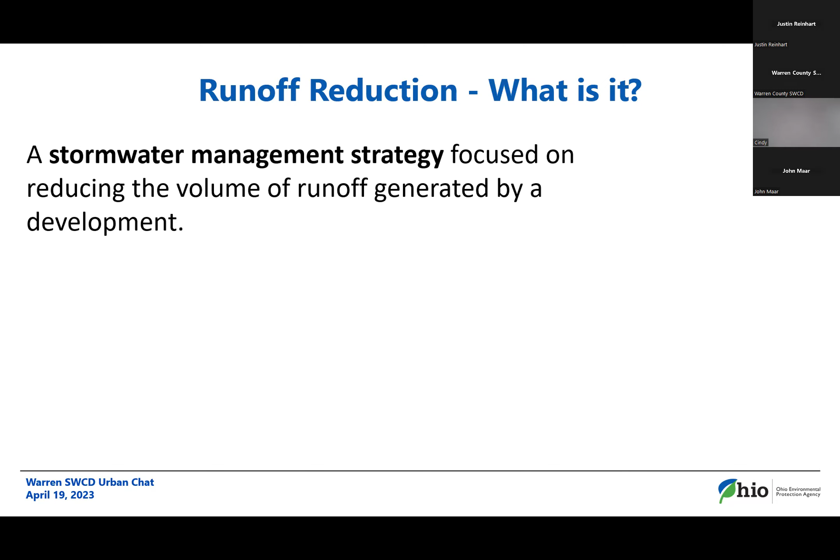And the keys to doing that are real simple. First and foremost is the goal of minimizing the disturbance or the disturbed area and the impervious cover of the development. There's not much more to say than that. There are a number of tools that could be used to minimize widths, shared parking spaces, minimize parking allowances based on zoning. Some of these things obviously are out of the developer or engineer's control because there are perhaps local ordinances, design ordinances, stormwater ordinances, or other laws and requirements, in which case the focus or attention turns to those municipalities and local jurisdictions in revising them, or at least reconsidering them.

The other is efficient layouts, utilizing pervious and impervious space as well. And that ties to the second objective, which is to maximize the use of pervious space and its benefits, through the ability to infiltrate, evapotranspire, and store stormwater, be it direct rainfall or runoff from those impervious surfaces that adjoin our pervious space. I will probably get those two terms confused as we interchange them here in the next half hour or so.

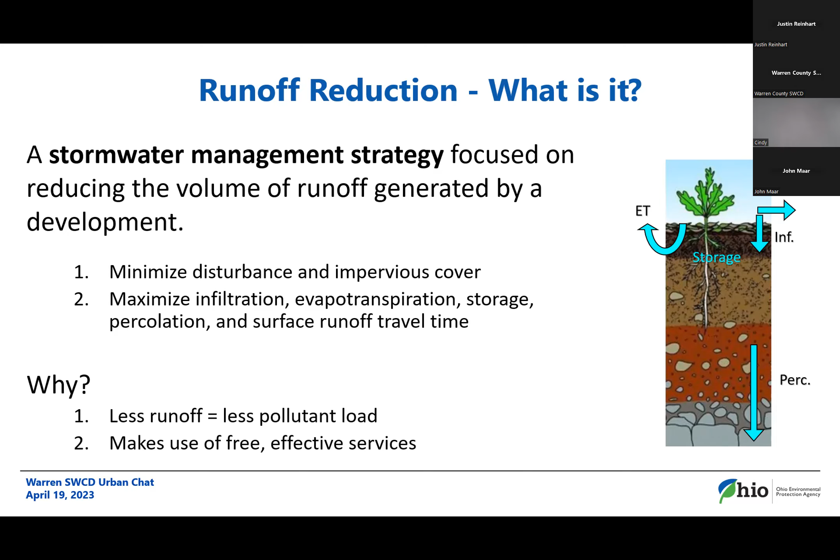So as we dig a little bit further, after minimizing the amount of impervious spaces and areas, the next fundamental component is disconnecting those that we do have to utilize, or maximizing those pervious open space areas. Those could be large areas, small areas, simply to make them functional or working for us rather than typical landscaping, which serves a beautification purpose, but not much else.

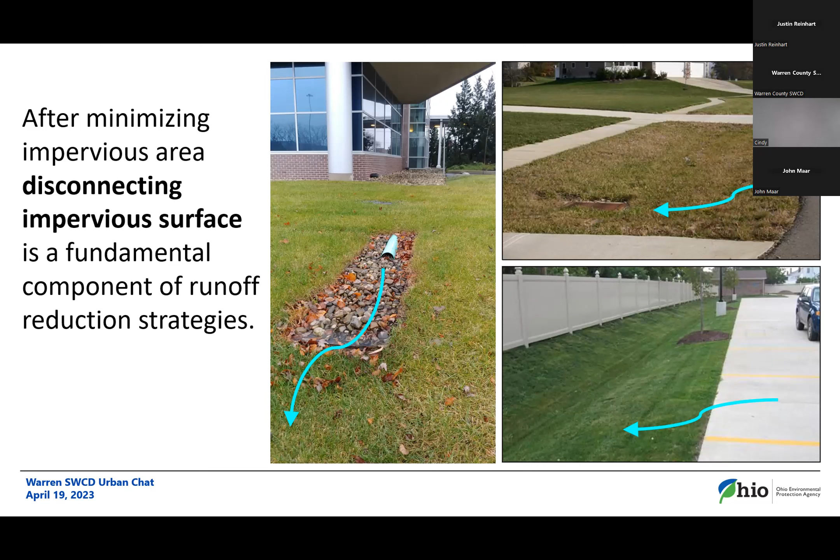Step two to that is, or the other component, is that we use BMPs that mimic natural hydrologic and ecological services. A lot of folks will want to immediately key in on the natural part of that. And I think these photos are good because they sort of demonstrate a side-by-side comparison of what those natural services are. On the top, a drainage, probably an ephemeral type stream coming through some woods, compared to an open swale that's designed for drainage.

And on the bottom, a low-lying area that may or may not qualify as a wetland, but certainly those pocket storage areas that provide surface storage, but also within it the soil and vegetative components that provide treatment mechanisms and allow that water to sit and infiltrate or evapotranspire. So it's not the look we're going for, although these can look similar, and that's sort of how it was first built, but it's replicating the services there through the soil and vegetation.

They are engineered. They're not necessarily trying to, although it's great to do, preserve the natural system, but an engineered system that mimics those natural tendencies and landscapes.

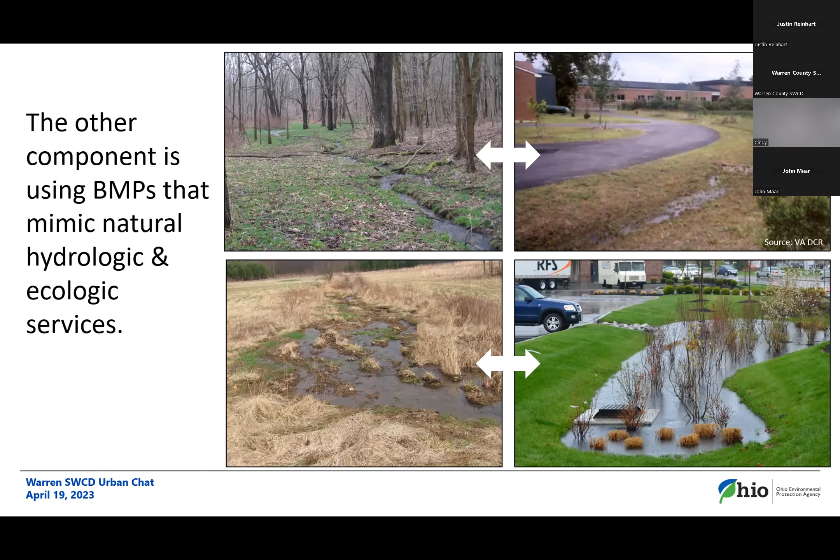So what I want to do first is go over 4 key understandings, or key points, and highlight them, as they're important in order to make this strategy really work. I should probably point out that the overarching overall strategy is

limited in its use to either sites that have the space to utilize these BMPs, or where the engineer can configure planned pervious space for beneficial use, or secondly, projects that are from the onset seeking to gain these credits. For example, LEED certification type buildings, mostly probably in the institutional development class or category,

where imperviousness is a little bit lower, and there are additional benefits to some of these types of practices from an educational standpoint, or other certification or credits through maybe stormwater fees or reduced other forms of assessments and taxes.

Okay, so these 4 key understandings. The first one is that the runoff reduction BMPs or practices are, as alluded to earlier, planned and designed practices. So in order to take credit, they need to be properly sized for the water that they're going to be receiving, the runoff.

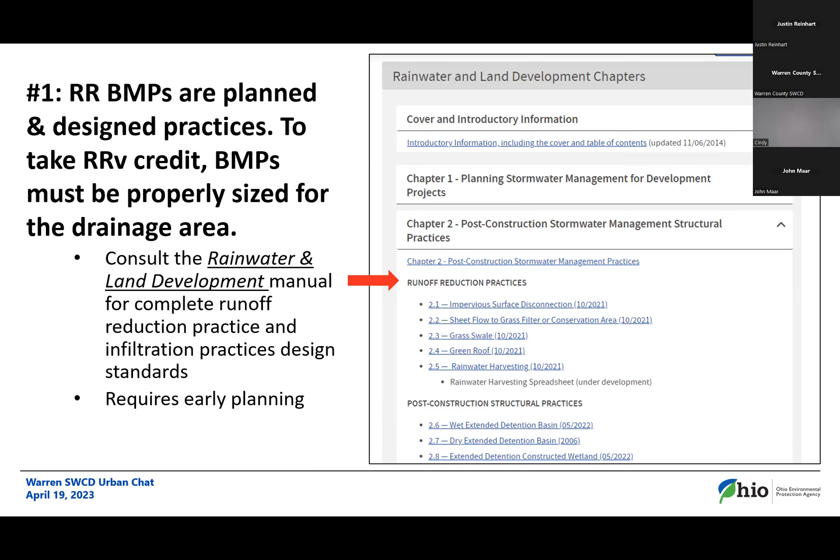Making sure, probably first and foremost, that we maintain sheet flow. If we have a gully form with water flowing in a concentrated manner, it's going to bypass all the things we're intending to do here. So the key to most all of these practices is spreading the flow.

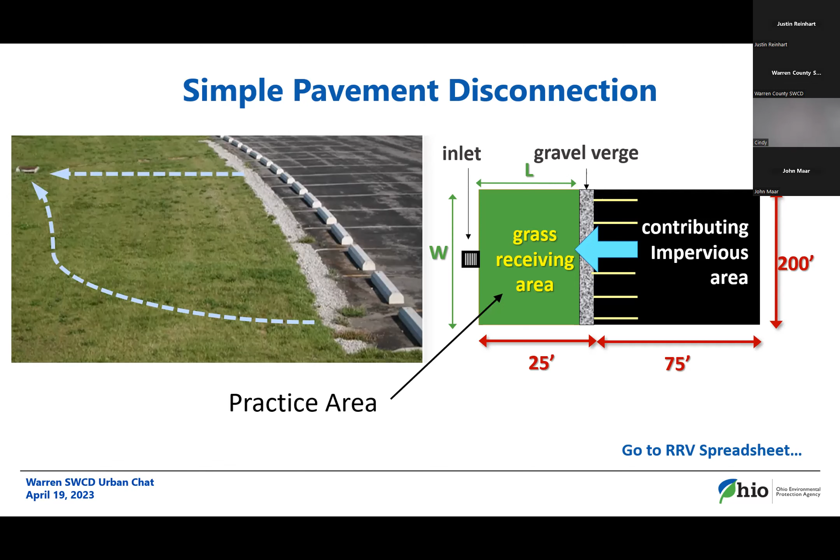And when I mention flow, runoff, etc., remember I'm looking at it from a water quality volume standpoint. So that leads me to the second highlight here: touching back to what I said earlier, the water quality volume is a little bit different from our traditional H&H, or hydrology and hydraulic engineering, in that it's representative of the annual volume of runoff we receive every year, which around the state is plus or minus 35 to 40 inches a year.

We're trying to capture a certain percentage of that and treat it, or in this case, make it disappear. The concept is that the vast majority of that 35 to 40 inches comes to us in small rains, small summer showers, short thunderstorms on the order of a half inch to an inch. Hence we have a 0.9 inch water quality volume requirement, as opposed to the big news items - the 2, 3, 4, or in the case of Fort Lauderdale, Florida, in the last week or two, 14 inches of rain - that caused the problems and receives all the news.

Ultimately, the practices work best as, in a sense, a treatment train, where they can slowly abstract a portion of that volume, decreasing the ultimate size of the final primary BMP.

So in many cases, that catch basin will still be outletting to a stormwater pond that will provide other services, but that pond will now be smaller. And they can also be, as I said, in a treatment train sense, stacked or ordered so that one practice flows into another.

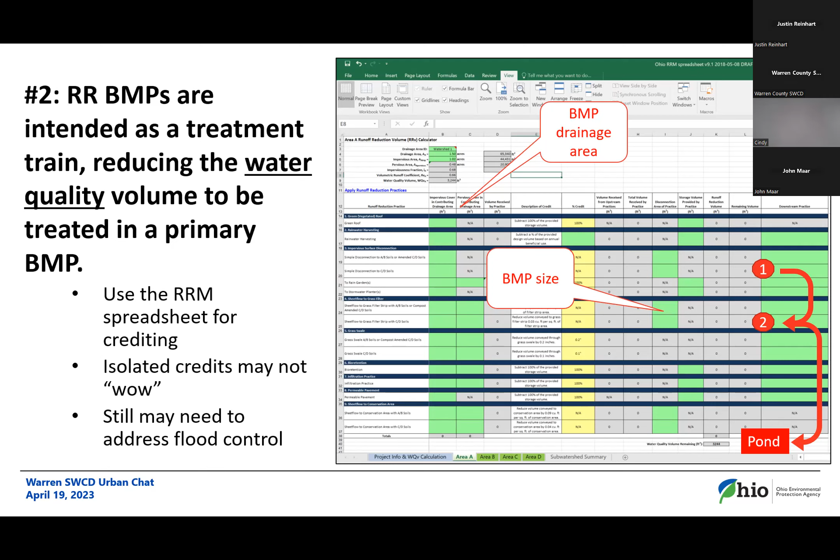I guess this is more 2A than 3 the way I presented it, but just to elaborate a little bit more on everything I just mentioned, I want to emphasize the point that the runoff reduction credits are small, but in terms of what we're trying to achieve, they can be very powerful.

So just capturing 0.2 inches, or as you look back to that spreadsheet, roughly what the runoff reduction credits are getting, it captures a tremendous amount of the total runoff from a site and puts it through either loss, abstraction, or treatment if it's just being filtered perhaps through that grass area.

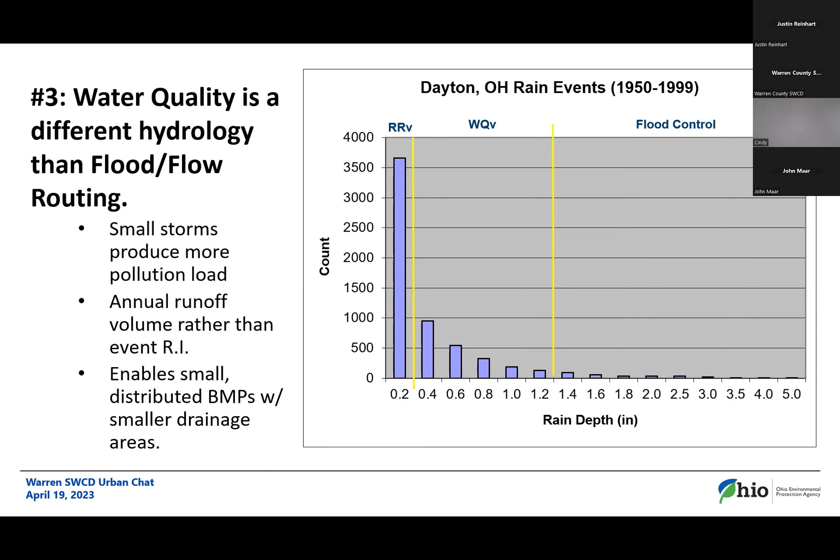Okay, and I guess highlight key point number 4. Soil plays a major role in runoff reduction. And it's not just the name of the map unit or the hydrologic soil grouping that we will first gravitate towards as engineers as we use in calculations, but what those represent, which are the more detailed, finer points and properties of the specific soil on site. I think back to my schooling in civil engineering, and I was really hyper focused on the water element.

I got into this position and career because I found the movement of water fascinating. Thought maybe I'd build dams someday, didn't quite make it to that level. Looking back, I've talked to a lot of students and up-and-coming engineers, and I've always said the one thing I wish I would have learned more about, and that engineering curriculums would focus on more, is soils. That was something I had the benefit of learning about in my previous position with the Division of Soil and Water at ODNR and Department of Agriculture.

The point is we look at texture. A lot of times we gravitate towards sands - yep, they'll infiltrate, clays won't - and leave it at that. That is important, but most soils are a mix, and they're also layered like a cake. So we have a profile in which these properties vary, potentially drastically. It's also a misunderstanding to say clays won't infiltrate - they can and do, sometimes very well. It depends on the conditions.

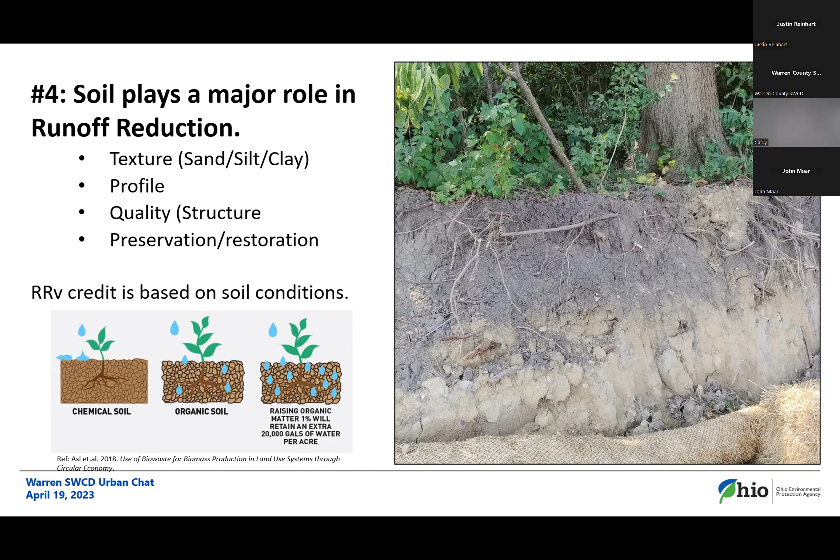So those are my 4 key points, and as I mentioned with the last one, everything ties together. As engineers, we want to tie to the hydrologic soil groups developed by the USDA, which comprise a lot of these elements and are good for our assessments from runoff calculations. Because of that tie, the credit values are split - a higher credit is placed on practices built on A or B soils, which are more infiltrative, and a lower credit value on C or D soils, which tend to be more restrictive towards infiltration, producing more runoff.

I did a quick assessment of Warren County, and this may or may not be terribly accurate. I took the largest area I could through the web soil survey and just did a quick summation of the soil groups, hoping that's fairly representative, although there are a number of different larger soil regions within the county in Southwest Ohio.

But I think this is probably pretty representative of much of the state, actually, in looking at the numbers, in that we have a very small percentage of A and B soils, generally alluvial deposits, sands and gravels, alongside our rivers and streams, or through prehistoric stream beds, or prehistoric beach ridges to the north part, or our glacial deposit end moraines, kames and eskers that are also isolated around the glaciated parts of the state.

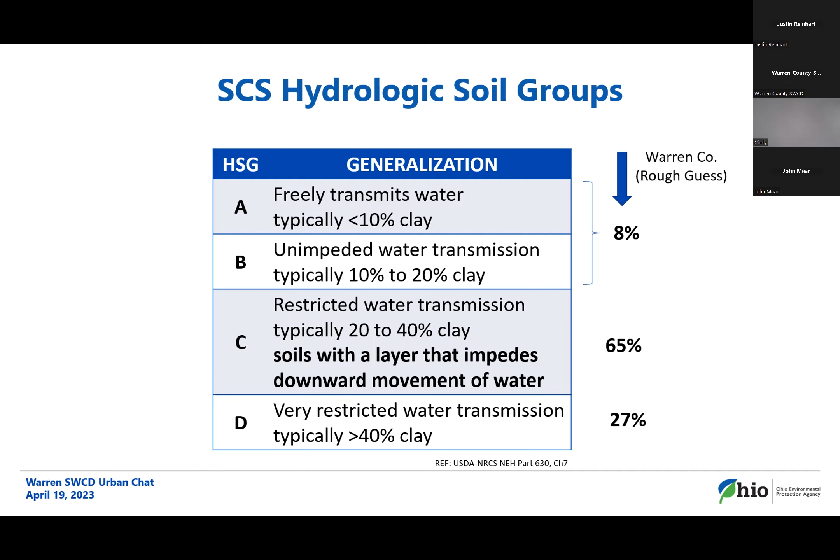So just to dive into the weeds a little bit more, when I look at these C soils, it really begs the question of, well, what do I have there and what can I do? How could this be a benefit?

So one that is somewhat prevalent in at least parts of Warren County, the Xenia silt loam, is a C soil, and we see some silts and clays. Runoff class is low and we are moderately well drained. So we see sort of a mixed bag on, well, what do we have here in terms of infiltration versus runoff?

And a lot of it probably keys on what I've highlighted here into the properties and qualities: depth to a restrictive layer, 40 to 60 inches to a densic material, so a dense layer. And we see that again in the chart here that shows a little bit of the clay content in the profile.

Most soils start out very low in the topsoil, very hummocky and loamy. Then we hit our subsoils, our clay content goes up, but then it gradually goes down as we proceed through the profile below, in some cases to 20%, which is a reasonably infiltrating soil.

What does that do for us? Well, we've got this densic layer down there. That's going to give us a perched seasonal high water table. So now we're going to have that water occupying the space above it in which we could be infiltrating stormwater.

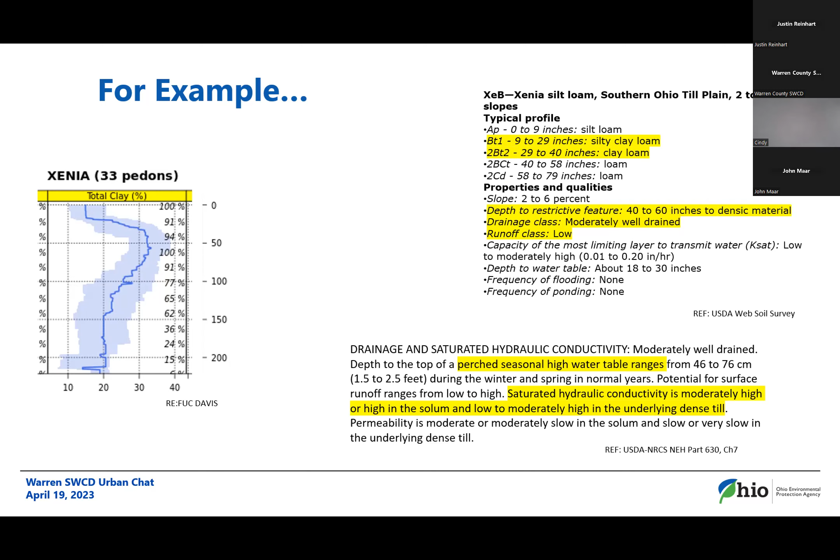Okay, so that's sort of just an overview of some thoughts before we dig too deep into the practices and the application of them.

I'll call your attention to the current permit language, and as of now, this shouldn't change in the next few days, but this will be the same in the sixth generation of the permit, which starts this weekend. It says the director may consider these practices to demonstrate compliance with post-construction requirements 3G2E for areas of the site not draining to a common drainage system, where the permittee can demonstrate the intent of pollutant removal and stream protection is accomplished there, which requires review and approval by Ohio EPA.

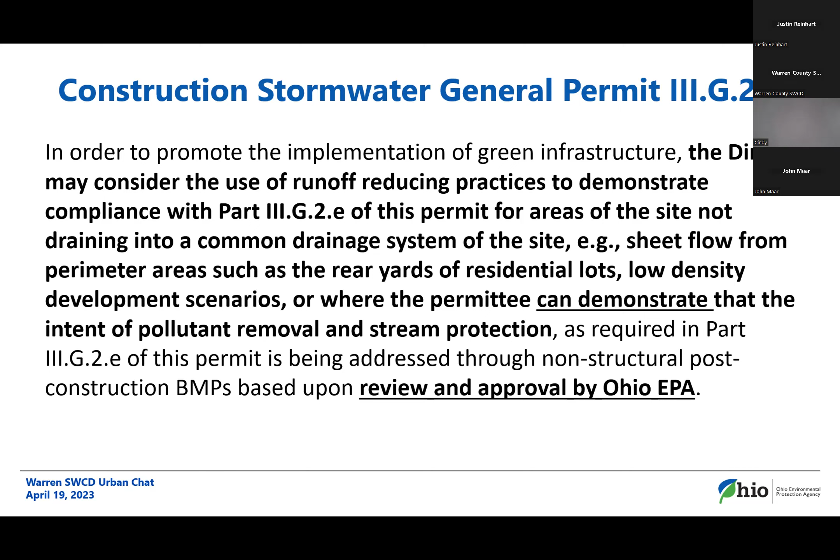So that language has actually been in the last couple of generations of the permit. We just called it green infrastructure before runoff reduction practices. The point is that through this process we've established, the standards in the rainwater manual and the crediting system through the spreadsheet, that's our review, meaning Ohio EPA's review and approval. We've approved this process to utilize for these areas, and perhaps where most interest lies is in things like rear yards or low density non-traditional developments, park space areas, for example.

So when we talk about perimeter areas, how can it be utilized? This is from a recent site. You can tell this is a low impervious development, somewhat of an institutional building coming in, where there's a paved roadway extending around the building that defines the boundary of the project and does not flow into the drainage areas highlighted here in yellow, described as undetained, or 1.01 acres overall.

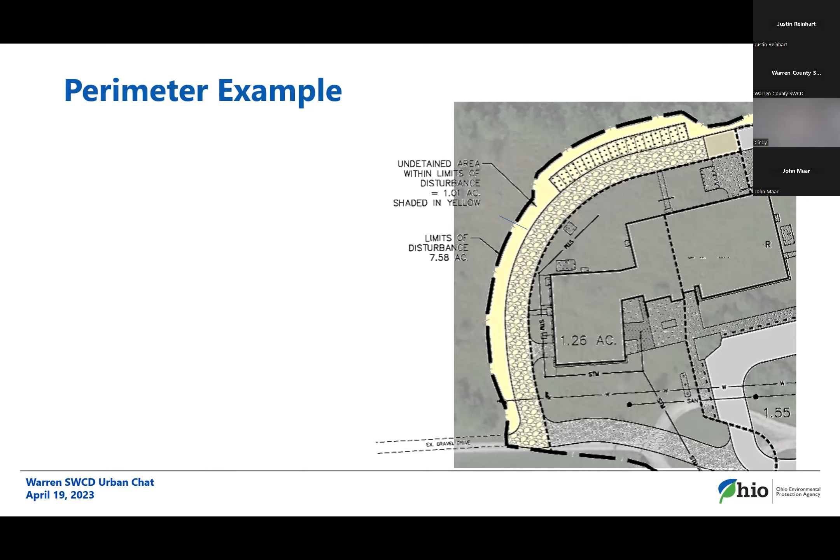I'm only showing you half of that 7-acre site. You can also see we have plenty of space and property extending beyond the actual project site. What we can do here is simply use that area. Hopefully from that photo you can tell that's heavily vegetated and forested. We can use that as a conservation area. We have our area sheet flowing off of the pavement into that.

We can dedicate, using the spreadsheet, for the 26-foot wide pavement, an area swath of about 45 feet on these C&D soils, and define that as a conservation area. And that runoff is then treated, so the water quality volume obligation for that 1.01 acres is attained through the conservation area.

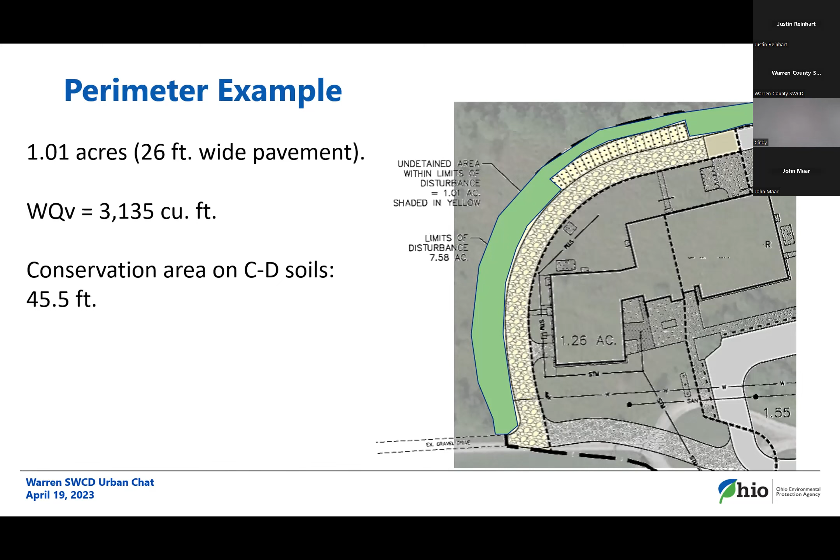Just pause for a second, because I think what I'm going to do is continue on and then maybe pull up the spreadsheet to show you later, so I don't have to do the technical dance back and forth between Excel and the PowerPoint.

The other example is in a residential scenario setting. So two different directions this goes: one being large lot developments, which we see from time to time, something on the order of 2-acre lots or more, in which case there's plenty of space that could be utilized for these practices. The other are maybe more medium density developments, which tend to be a little more cookie cutter in design, in that the lots are fairly identical.

Maybe here and there shapes will change as we reach cul-de-sacs and corners and whatnot, but by and large they generally tend to be approximately the same size, and the homes and building pads generally tend to be about the same size and location within the lots as well. So something like this, one of obviously 40 homes going into a subdivision.

We've got a boundary lot here, and it is almost a half acre in size. We've got a building lot for typical home dimensions shown. I assume these are falling within the typical world - if not, then let me know. But I've used this example a couple times before.

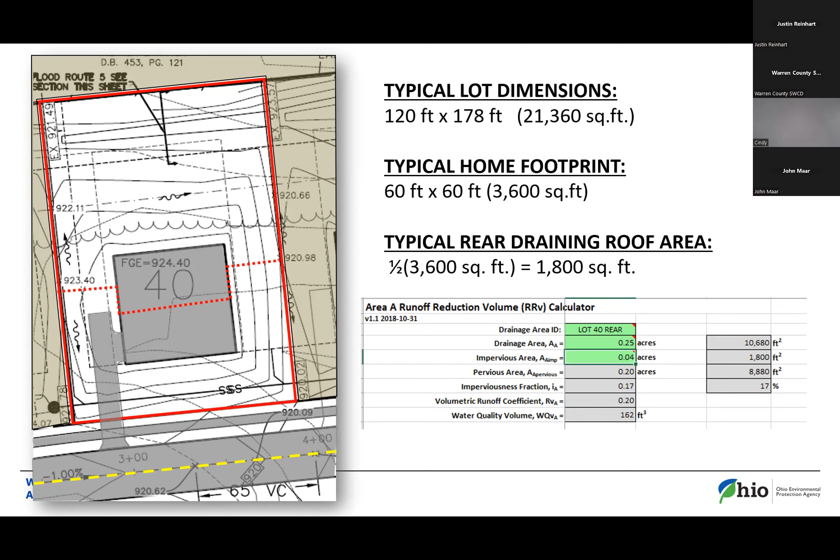And what could I use in terms of runoff reduction practices here? Well, the first is if I can disconnect those downspouts, have them flowing out into the grass. Now, reasons why this is good and bad from a development standpoint: obviously, homeowners generally aren't fond of standing water, or want water to move away from the foundation of a house structurally.

So there's certain criteria here that we need to make sure that we can do both of those. But I can designate a grass receiving area for, in this case, 2 downspouts of a certain size, and apply the credit through the spreadsheet here.

So if I were to look at the water quality volume we're dealing with, and these numbers get small. Again, this is typical, lot 40, a water quality volume of 162 cubic feet, again small. I'm now subtracting out through this disconnection 40 cubic feet. I still have 122 cubic feet that might flow into a rear yard catch basin and then into my pond.

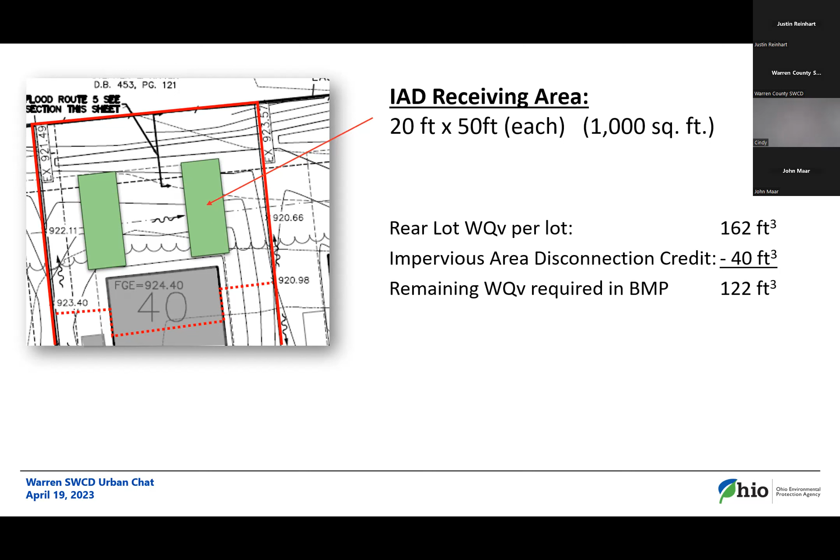Now I've reduced the size of the pond. That may or may not help or be of benefit to you. Perhaps more beneficial might be to dedicate a portion of that lot as a conservation area to absorb the remainder of the water quality volume.

In this case, 30 feet of that lot would be left in a conservation area. Using the credits in that square footage, I'm now deducting another 122 cubic feet, effectively zeroing out the water quality volume owed for that lot. So that's the quick and simple math to it.

I don't want it to seem too hard, but I also don't want it to seem too simple in terms of these practices, as I said, are design planned practices.

Now the question there becomes, I guess, how do we evidence all of this, and what do we do in terms of submittals? Well, as I alluded to, we have the spreadsheet that is created, which would do the math for you from a crediting standpoint.

The BMPs need to be identified on the plans and then the SWPPP, including where they're at, their dimensions, any soil restoration activities that might occur, preservation activities. Typical drawings are probably feasible in the example I just gave. Others may need to be individually detailed if these are very large.

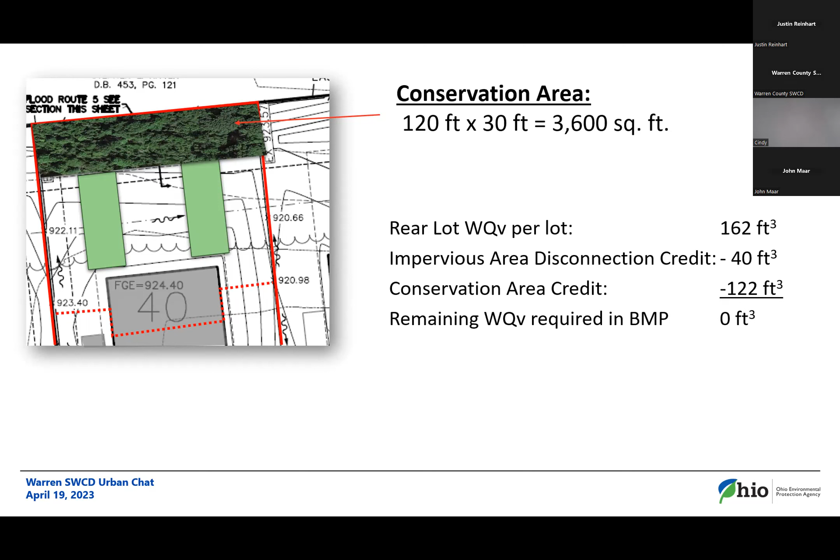Pros and cons to that. It may be very desirable, an actual amenity in some communities' properties, and others obviously are going to want a 4-inch turf fescue grass. And those are decisions that will need to be made by the designer and developer as to the practicalities.

So what we're looking for there is the fact that, once landowners or homeowners move in, these practices aren't going to be viewed as having a stormwater purpose like the pond up front will be.

So we need to take some measures to safeguard it. Some options are spelled out in the Rainwater and Land Development Manual, as far as tools that could be used, from legal protections and instruments such as easements and deed restrictions to educational tools, and other potential ideas like securing definitions in plat maps and deeds, etc.

That's again, I think, where we're at. It's maybe not the clearest answer, but hopefully gives more detailed guidance, or some detailed guidance.

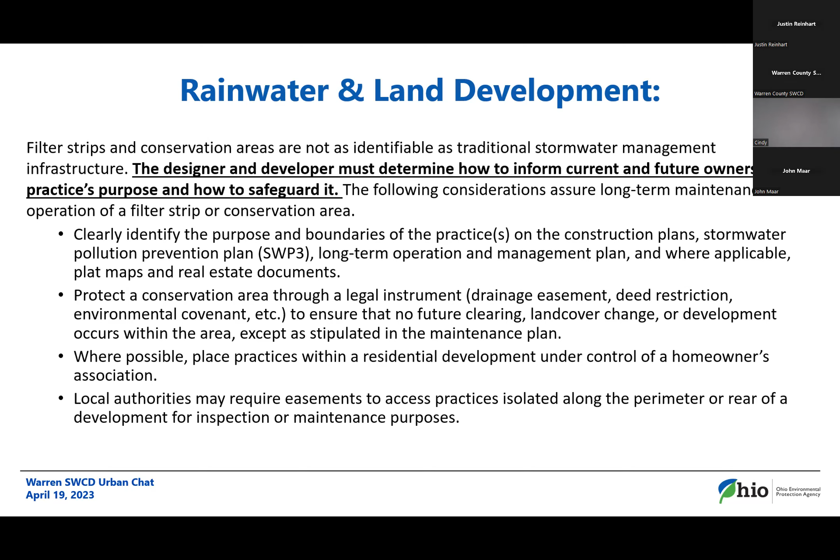While I'm on the topic, before we wrap up, I want to mention that the rainwater manual is online, and I should have put a link here. Our website's changed a couple times now since I've been at EPA, they like to do that to me, so I don't have a link. You can probably Google it, but it is maintained there online.

The agency, through mostly me, is in the process of improving, expanding, and updating that. And as things change, or any announcements come, including training opportunities such as this webinar, or fact sheets, or anything else on the technical end, not the permitting end, you can subscribe to my email list.

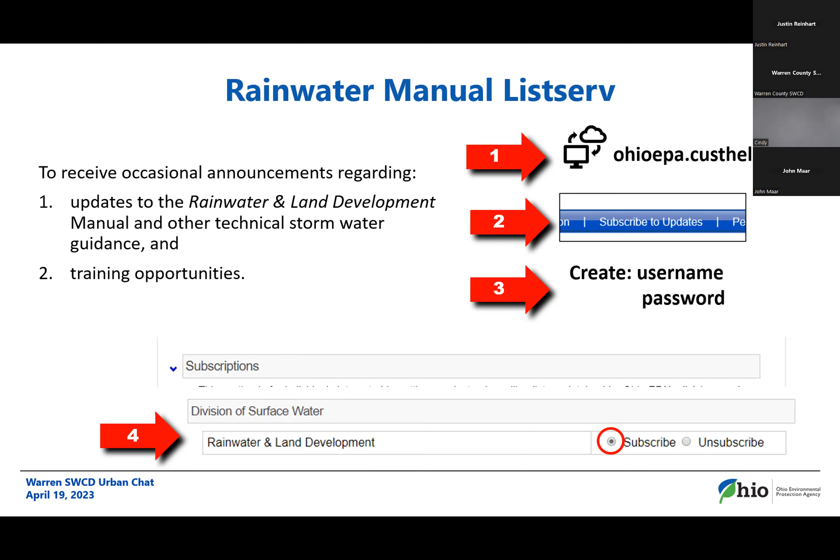What I'll do here, if we have time, is first, my contact information is on screen. I'm going to try and pull up the spreadsheet and see if we can answer any questions quickly, because I want to still leave 10 minutes or so for Justin to talk.

I'm believing you can see my screen here, and it's now changed over to the spreadsheet. Appreciate the confirmation. So I have in here populated that example really quickly, let me start from the beginning.

The first page allows you to put in your project information, and I have 4 different tabs. So say you had a site using 4 different sub areas, maybe you're going to take half the parking lot to a filter strip on the perimeter, and the internal part of the parking lot to a bioretention cell, and the islands, you could designate those as different areas, up to 4 different areas. You could use more spreadsheets if it gets more complicated, but that's as many as we built in for now. It will total everything on this first page from the 4 different areas.

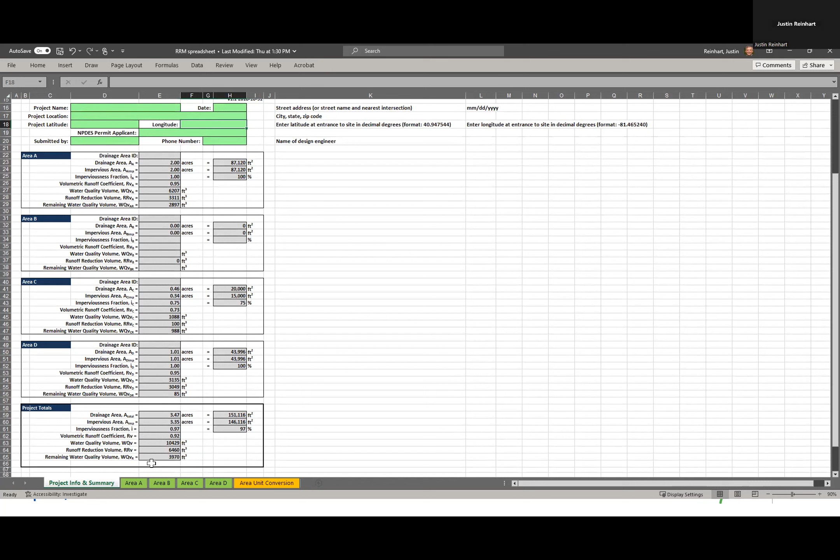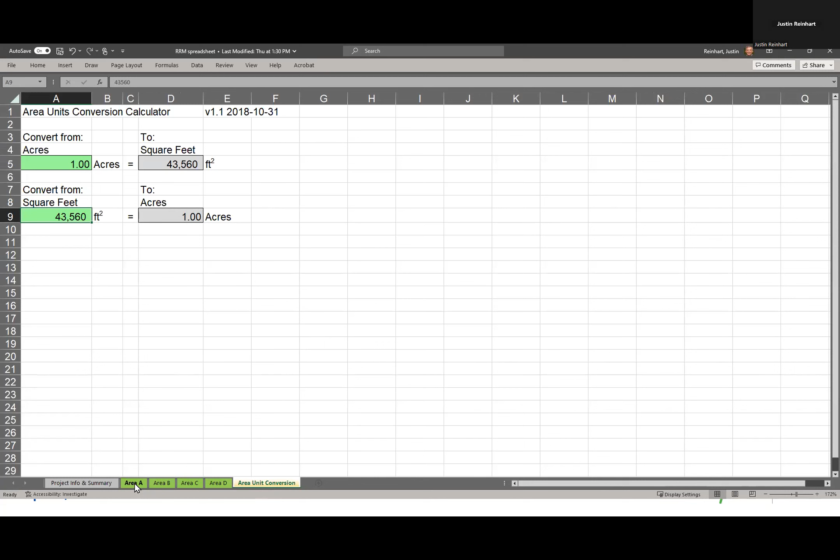And lastly, because we go back and forth in the spreadsheet, unfortunately these are small areas so square feet tend to work well, but most of our calculations present themselves in acres, so we throw that calculator in at the end just to make life easy for you. Or I just type the formula straight into the cells.

I don't think I did it here, but what you'll do for one of these areas, and I've used this tab for a few different things, let me move to area D, which is where the calculation I want is. You can see up top, you plug in the drainage area for this particular sub area and the amount of impervious. In this example, it was just a tick over 1 acre from that perimeter driveway draining into a conservation area. So what I'll do here is just go down, find the last BMP, or sheet flow to a conservation area.

I said I was in C—this is not the C/D hydrologic soil group category, but C or D soils. I had that put in now in terms of square feet, my 1.01 acres of roadway, and I had no grass going into it or pervious area.

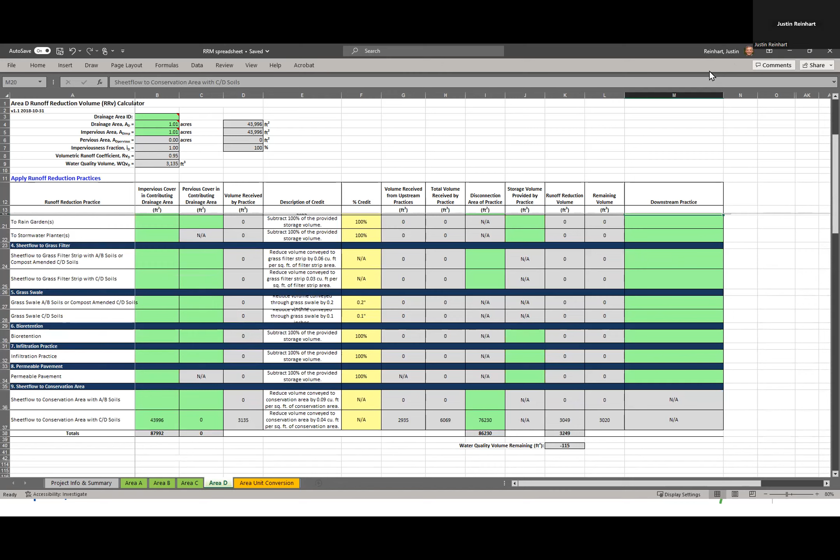Okay, so if we have time for questions, I want to leave some time to talk about the local requirements there, but anything I can answer now?

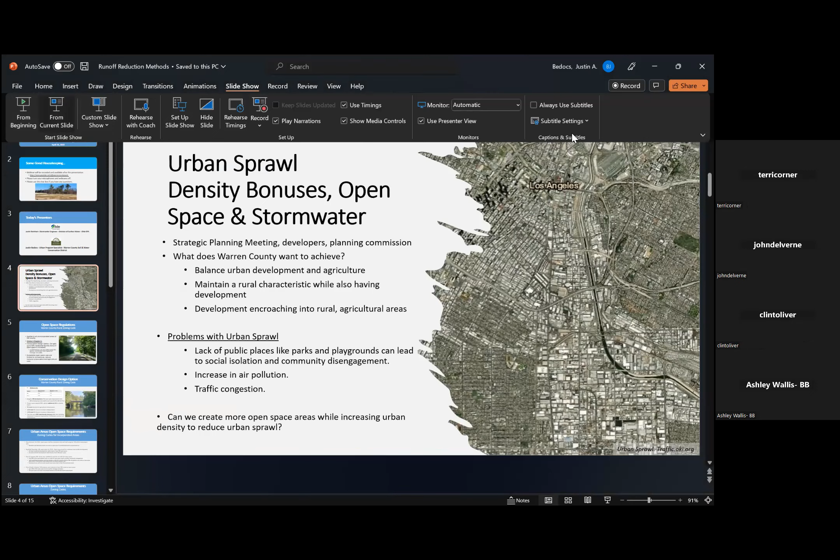All right, going to zoom out here a little bit and talk about urban sprawl and open spaces, density bonuses, and how we can use some of these runoff reduction methods or other infiltration practices to also count for stormwater control. Earlier this year, we had our strategic planning meeting.

The table I was sitting at had developers, contractors, and a gentleman from the Planning Commission. One of the questions asked was, what do you think the goals are for Warren County Soil and Water in terms of natural resources management in Warren County? One of the responses I liked was from the Regional Planning Commission.

He mentioned that we want to promote development—we need development—but we also want to preserve this rural aesthetic that we have in the county and try to have less urban sprawl and more open spaces. Basically, we want to balance urban development with agriculture.

We have farmland preservation programs here. We're seeing lots of development and urbanization in the county, encroaching into rural agricultural areas. There's a nice picture here on the right of Los Angeles, some pretty good urban sprawl, not seeing a whole lot of open space or green space.

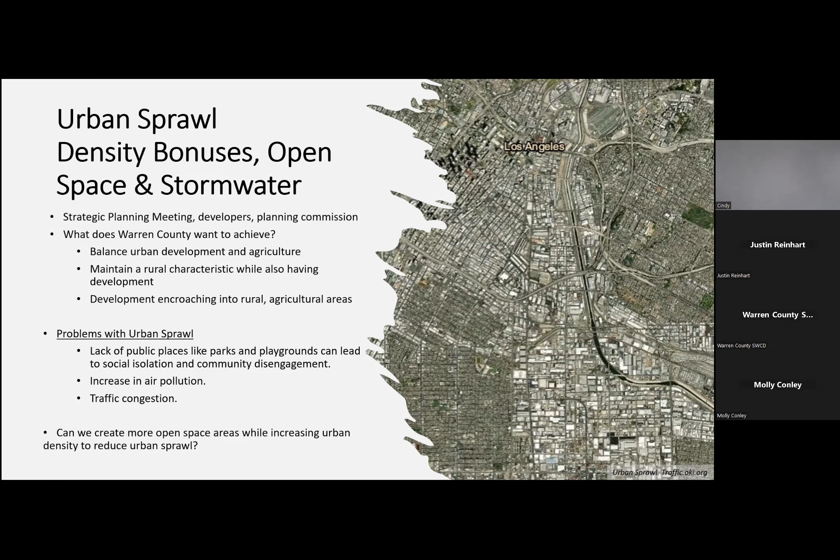So are there ways that we can create more open space while also increasing urban density in order to reduce urban sprawl? So let's talk about urban density bonuses in these areas.

When I looked at the Warren County Rural Zoning Code, which applies to all unincorporated areas of the county—this is from Article 2, Chapter 3—they have this conservation design option where you can gain up to 50% residential density bonus if open space is increased. The lot dimensions can also vary when using this option, so you can deviate from the typical lot frontage and width. There are different types of open space uses accepted: recreational category, natural resource preservation, and also agricultural uses.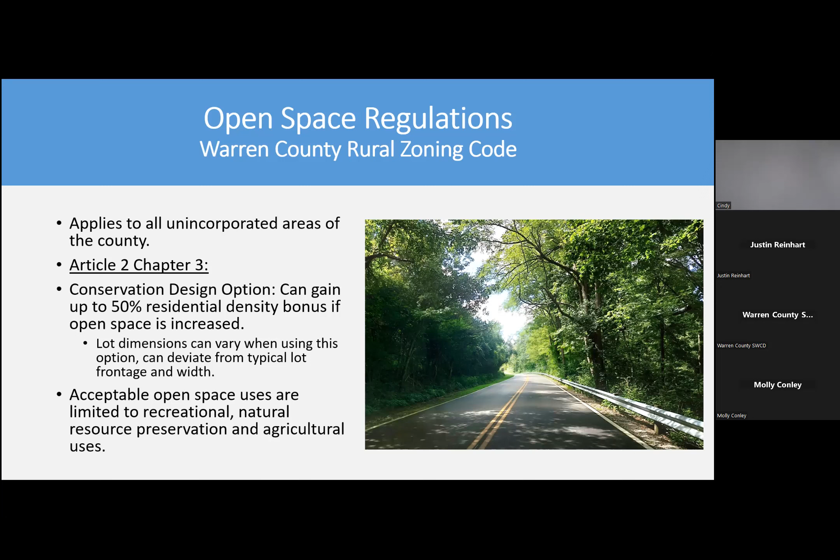So you have this table here that shows minimum lot sizes and the district density units per acre. So the RU, residential unit, or I think that's rural residential, has a base density of 0.20 units per acre and a minimum lot size of 1.25 acres.

The R-1A has a little bit of a higher base density. You can actually gain a 30% density bonus to that base density if the open space requirement is met. So for the RU, 40% of the total project area shall be open space.

For the R1A, you need to have 30% open space. But if you bump that open space up to 50%, you can add an additional 10% to that density bonus. You can get an additional 5% more if it's for agricultural enhancement, another 2.5% for natural resources enhancement. And I checked, that does include stormwater control.

And then another 2.5% more if you have any kind of historic buildings on the property. So in the end, you can get up to a 50% total density bonus while also satisfying stormwater treatment requirements if those infiltration practices are implemented.

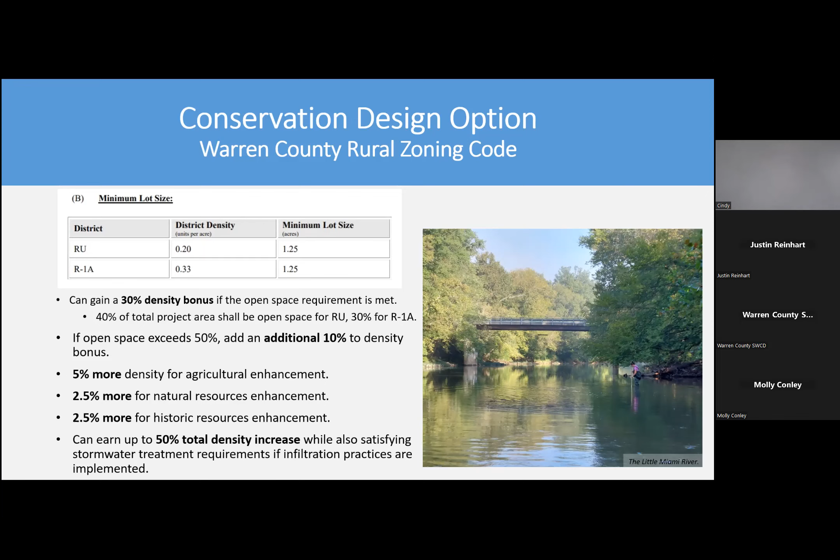So trying to tie this together with Justin's talk about the runoff reduction method, can we get two birds with one stone here?

No animals were harmed in this production, by the way.

So that was the rural zoning codes. And now I also looked at incorporated areas, and these vary a little bit from town to town. For City of Mason, for the PUDs, they have an open space requirement of 20% of the total project area. And both retention and detention ponds can count as open space if they're partially dedicated to recreational use.

So that's another thing I've seen - some of them will not allow the detention ponds, the dry basins, because they don't have as much recreational value. People like to have standing water and birds and ducks and things, and paths to walk by. So some of them will include the detention ponds in that bonus, but other ones won't.

Deerfield Township, 20% open space is their minimum. But the open space must also be common area to the development, not just one person's house. It needs to be accessible to the whole development.

You have all mixed residential developments should have at least 30%. And then park residential developments should include at least 40% open space.

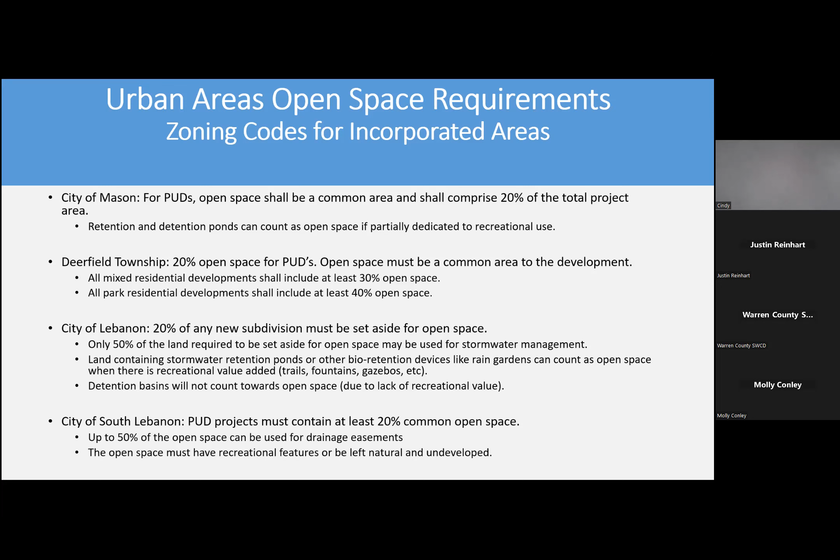South Lebanon, their PUD projects must contain at least 20% open space. And again, up to half of that could be used for drainage easements. Must have recreational features or be left natural and undeveloped.

City of Franklin, they were a little bit different, a little bit more vague I think on theirs, but a little bit more flexible too. So they say they must have open space, but they don't really outline a distinct percentage - the planned residential conservation overlay district.

So they do want to maximize conservation of open space. They have a 25 acre minimum, and 30% of that shall be open space in that conservation overlay district. One of their six objectives is to reduce stormwater runoff and improve water quality from runoff. So again, these infiltration practices, runoff reduction, I think that would apply to theirs as well, pretty good.

Down in Morrow, 25% of the total lot or parcel shall be dedicated as open space. No more than 25% can include water bodies or wetlands. So they're a little bit more stringent on theirs. The other ones were up to 50%, a little bit lower that they would accept.

They have density bonuses that you can get. Basically 1% density bonus per additional 1% of open space created past the minimum, up to a maximum of 15%.

Hamilton Township requires a minimum of 20% open space for the project area. 15% of that must be common areas, and no more than 35% of that could be used for retention or detention. So keep that in mind, they can't use all of it, but you can get bonuses for doing this stuff.

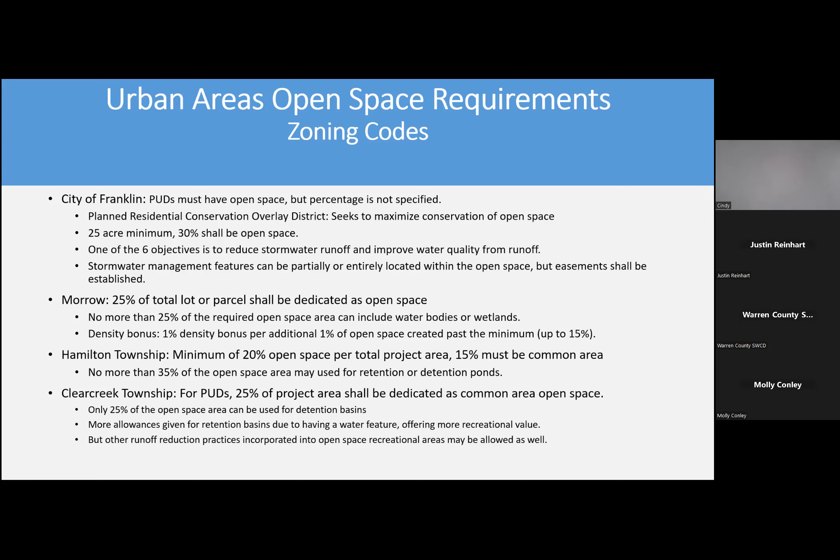And then Clearcreek Township, 25% shall be dedicated as a common area open space, and 25% of that open space could be used for detention basins. They have more allowances given for retention basins due to having the water feature and the increased recreational value, but other runoff reduction practices incorporated into the open space areas can be allowed as well.

So you have this extra open space you're creating, and what can we do with it? We were thinking stormwater control practices can count to an extent. As long as you have these recreational components built in, that'll increase the value and the density credits you can get. A good example here is South Lebanon, they applied and qualified for our Operation Rain Garden grant, and we awarded them $50,000 or $60,000.

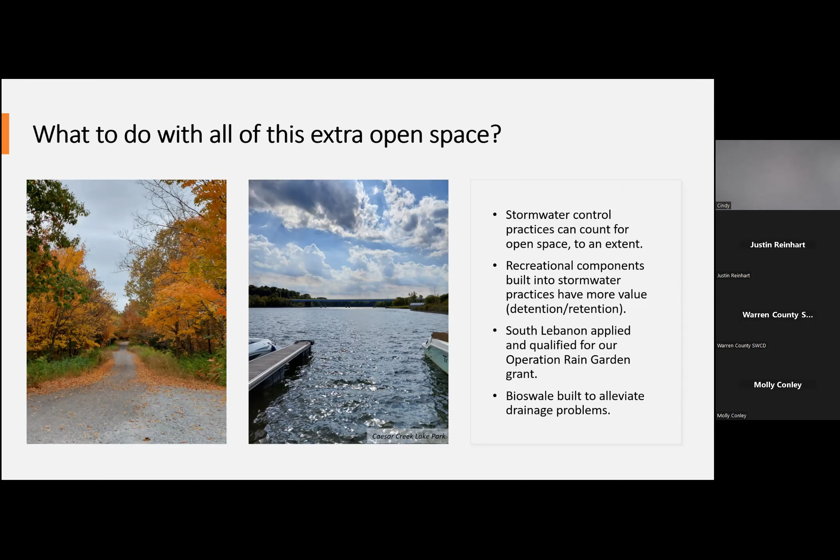They developed this bioswale to help alleviate drainage problems they had in the area. So this was the existing conditions. You can see the topography draining this way, kind of to the left and then to the bottom here. And you have an existing building, a house, and some trees over here, but they had some drainage problems in the area.

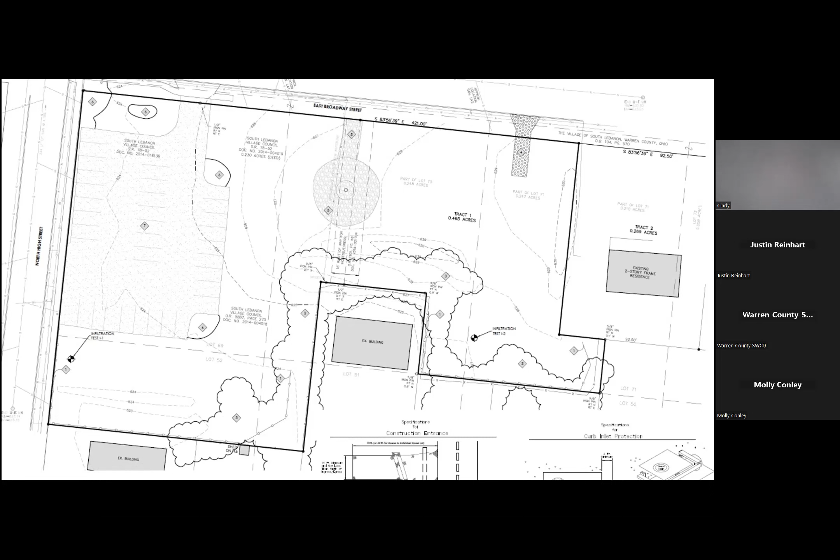You had a parking lot here, so impervious surface, lots of sheet flow coming down. This was already an existing project, and this bioswale was put in after the fact. But bioswales could probably be built into the SWPPP design, into the subdivision design from the get-go, and probably get those runoff reduction credits that Justin talked about earlier.

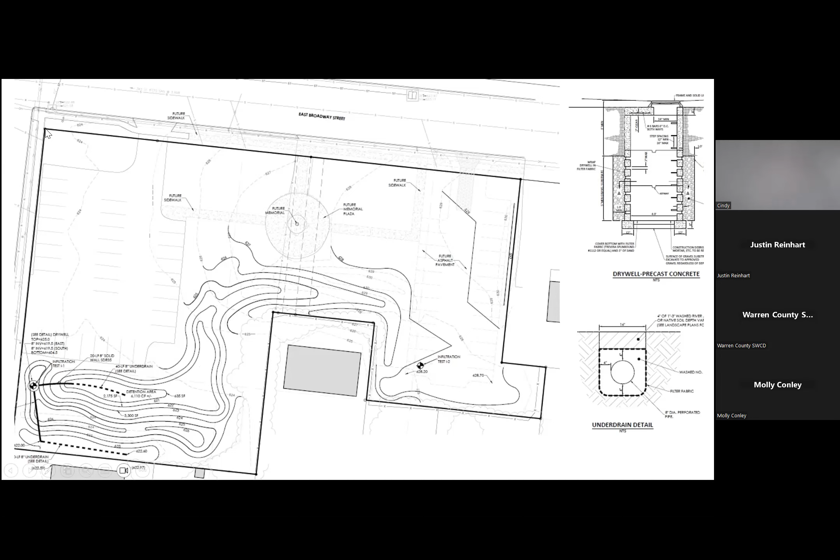So here is the design of the bioswale. It's kind of an L shape here, collecting that sheet flow, allowing it to infiltrate into the detention area. They put an under drain in with a dry well to let that stormwater soak in. That way it's disconnected from the stormwater drains, just letting it soak into the ground and infiltrate.

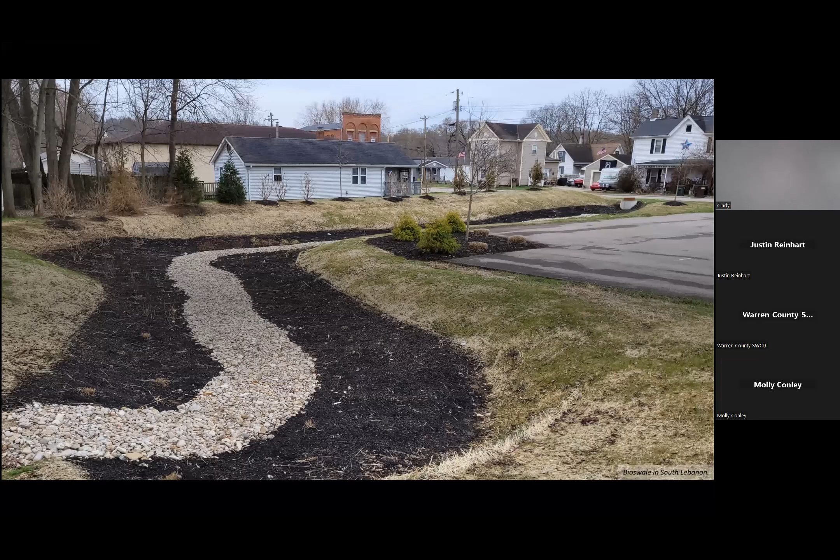So wrapping it up here. I know it went over a little bit, but thanks to everybody who hung in there. We do have an upcoming Urban Chat in August, and we'll be talking about soils in that chat. Justin talked about soils earlier and how you want certain soils to increase that infiltration rate.